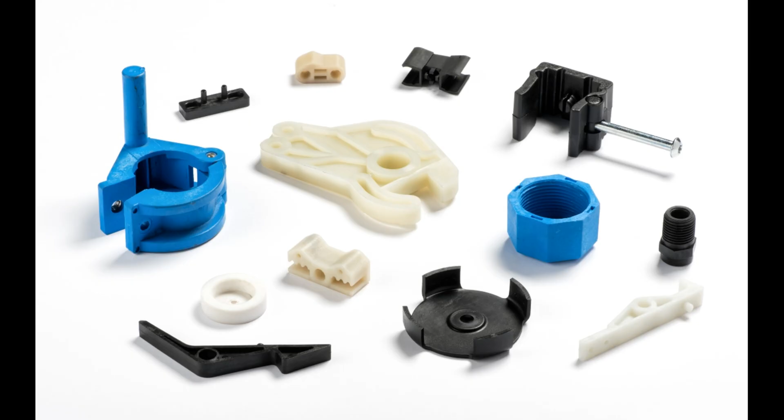Here are some examples of some injection molded parts. See how they're very complex in their shape.

We will be going over basic components, detailed animation demonstration, safety, how to operate VPT set point, examples, strength demonstrations, and works cited throughout this video.

So, basic components and actions. We've got the hopper, which fills with resin or whatever material you're using, goes through the heater, which is moved by the screw into the mold. You've also got on the right side the ram, the hydraulic fluid, and the motor that powers the screw.

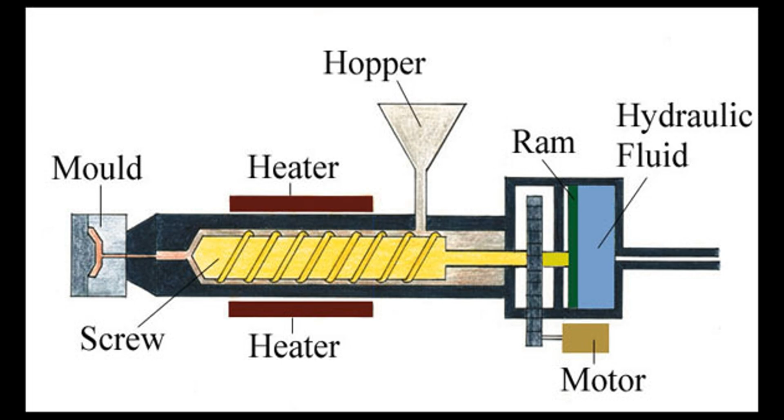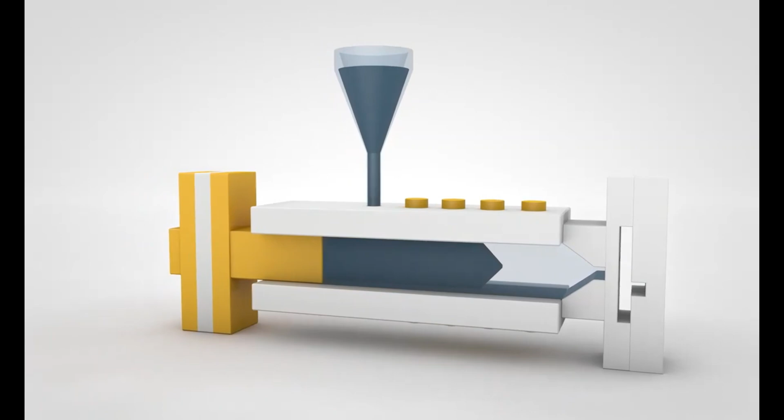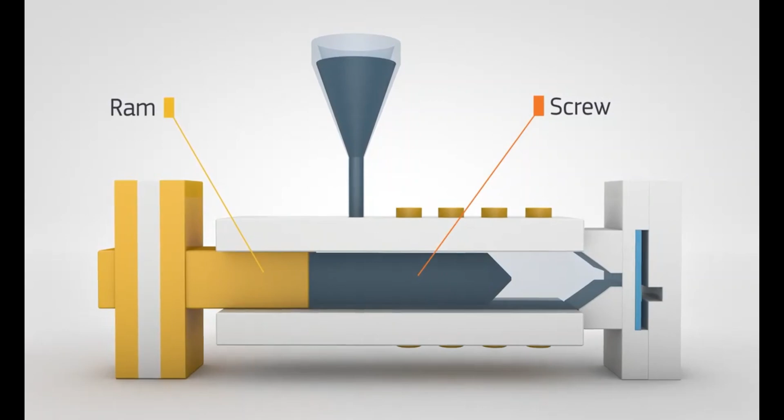Once the resin pellets are loaded and digital instructions are programmed, the pellets move from the hopper to the barrel, where they're melted by heaters in the press. The ram and screw on the press work together to compress and inject the resin into the mold's runner system and through the nozzle to the mold cavity.

After the cavity fills with resin, the mold opens and steel pins eject the thermoplastic part. Final parts are shipped in as fast as one day.

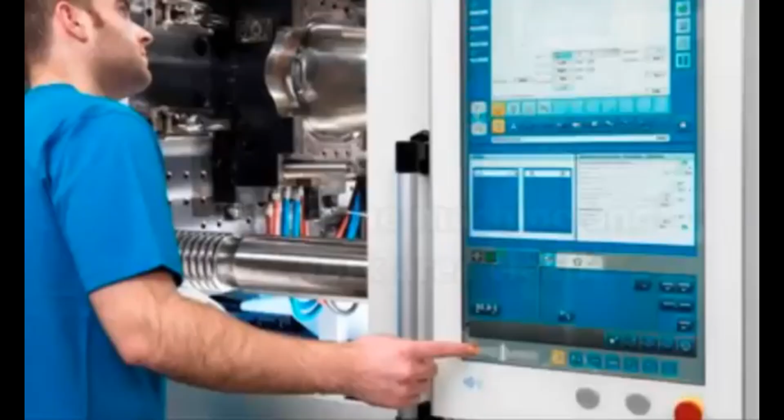Operating an injection molding machine is quite safe. Obviously you have to wear your standard PPE and mind what you touch, as there's lots of hot objects.

Okay, so now we will go over how to operate the injection molding machine using this video as a demonstration. So here's an example of the finished part they create throughout this video.

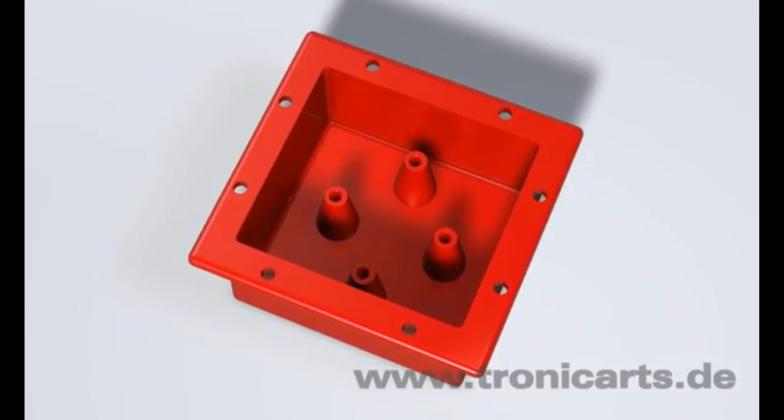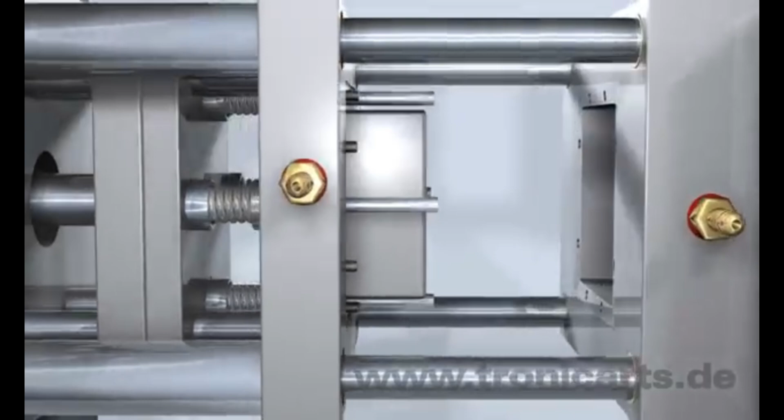So with operation, we begin with selecting the appropriate mold, and here is the example of the mold that they used to make that part previously seen.

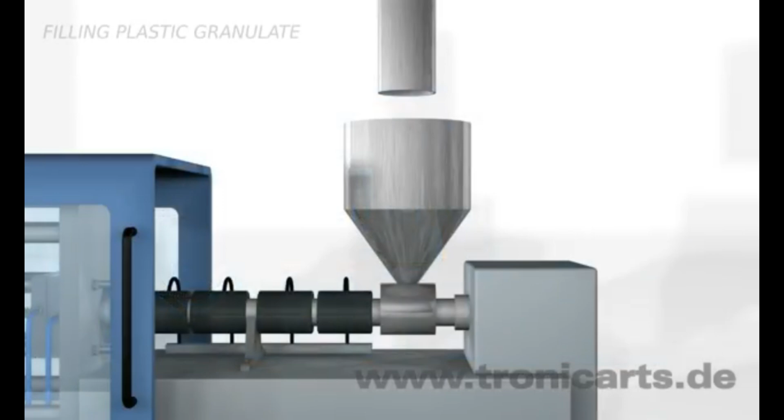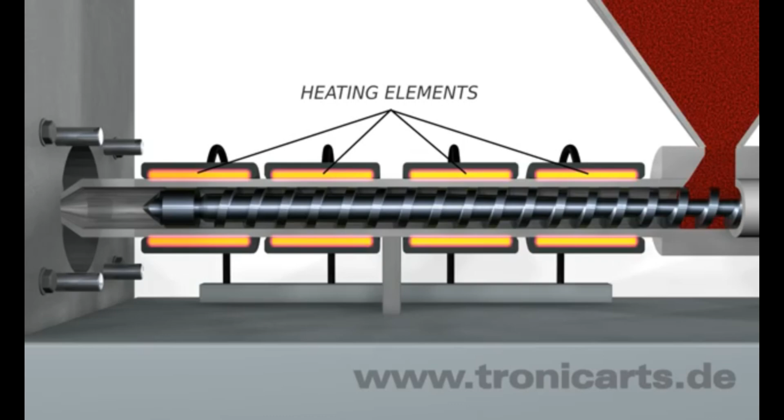Now here's the machine. So in operating, you stand in front and control using the computer, and you put your granulated plastics or material into the hopper, which then go through the heating elements, and the screw injects the melted material as it moves along the screw.

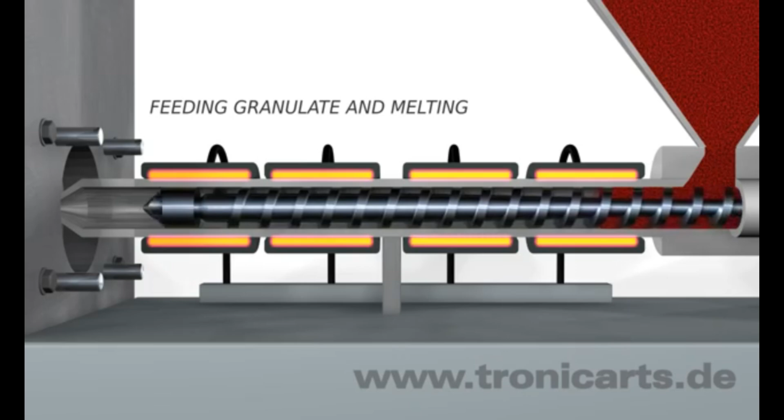So now you can see that it's spinning the screw and processing the granular material into liquid as it approaches the mold, where it is then injected into the mold.

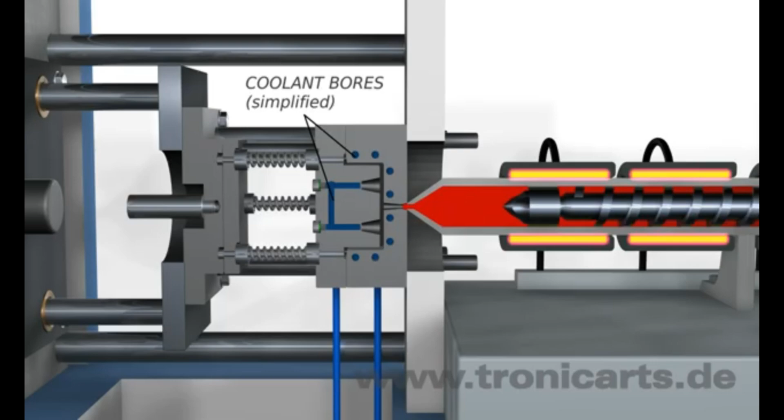As seen there, we have to make sure we choose the right material and the right amount of heat to get the material melting at the right temperature for molding, which is then cooled through the cooling system in the mold.

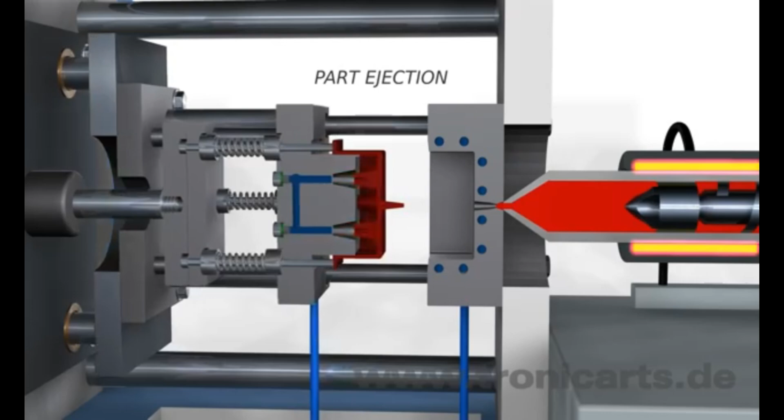Throughout that process, you have to have the right calculation of material to heat to cooling ratio using the machine computer on the left side of this machine, and it's repeating this process a couple times as it is showing.

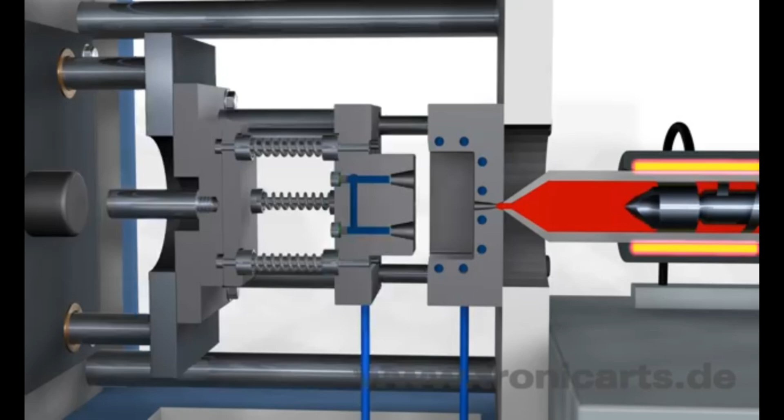So yeah, the operation is actually pretty basic because it's mostly computer controlled. You have to do a couple calculations for the heat, and other than that, it's just timing issues that you program into the computer on the left side, and that's how you operate.

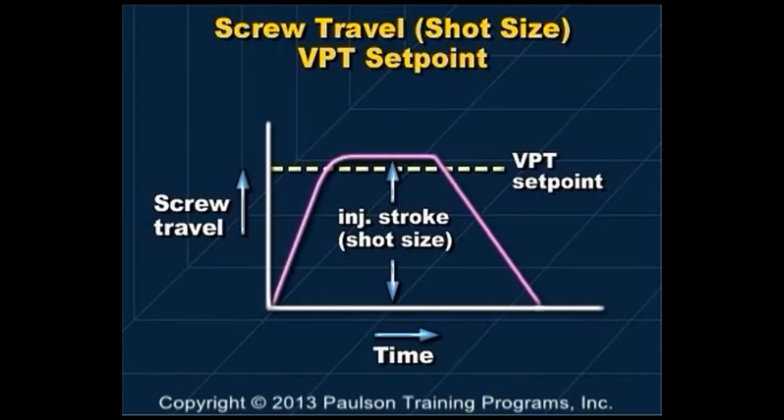We'd like to set the VPT set point to occur just as the mold is full, slightly before the screw stops moving forward, about here. We could check this by making short shots. During injection, when the screw has traveled a distance set as the VPT point, the control system switches to pressure control to start the packing.

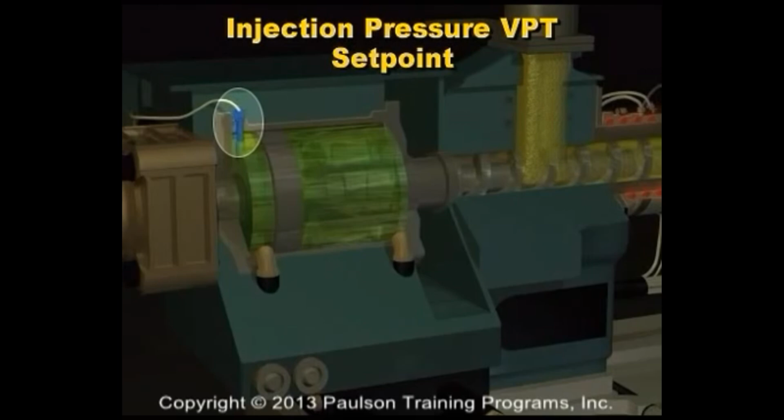Now we'll look at another possible measurement to use as the VPT set point. Some control systems use a hydraulic injection pressure measurement. A hydraulic transducer is put in the injection circuit to measure the oil pressure. In some molds, generally the easy-to-fill molds, there is a sharp rise in the injection pressure when the mold is full. If this point is apparent, it can be used as a VPT set point.

If you're molding thin-walled parts, the hydraulic pressure may not show this break in the curve. The hydraulic pressure may rise too quickly.

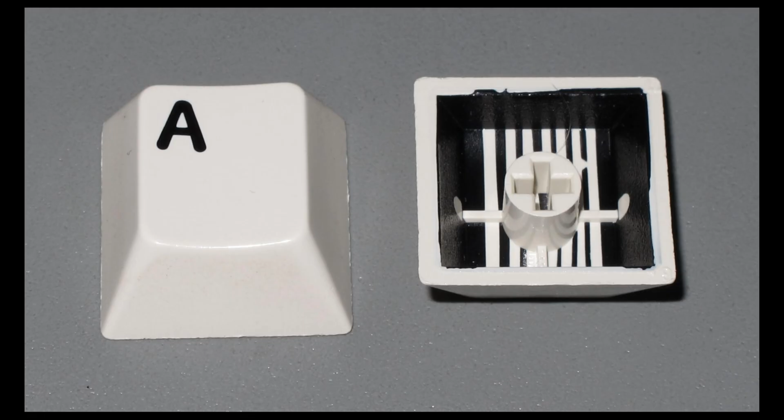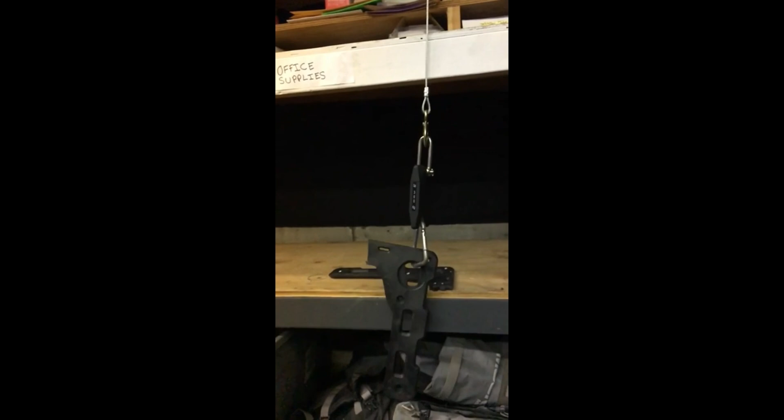I feel like I'm kind of in the impact zone here. 165, 170. That's better than before. We could stop, or just sit at 180. Already surpassed the previous result, and it's barely deformed. There it goes. What's it at? 198, 200. That whole shelf totally flinched. So, what did it go to? 200? Yeah. Way better, way more strength and much less deformation. That's amazing, that's so cool. It's basically better in every respect. Yep, it's stiffer and it's stronger.